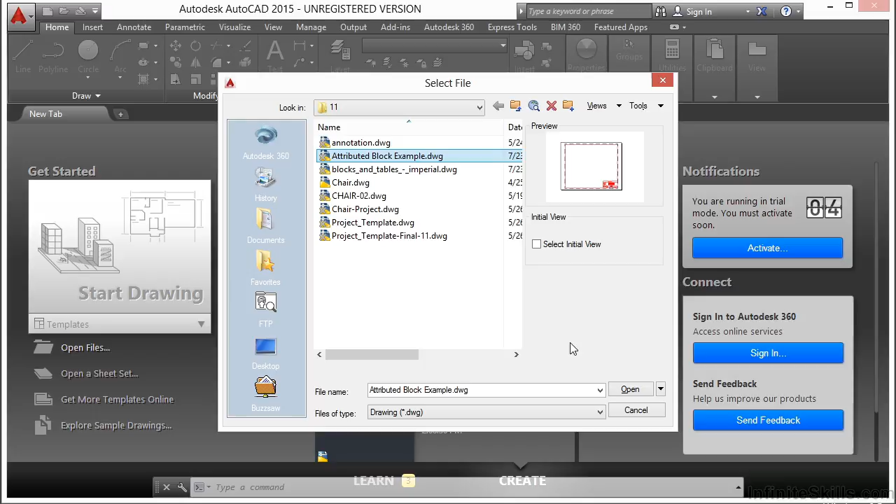This file contains an attributed block that has been inserted as a title block for this drawing. It's right here. So you can see when I hover over it, it looks like it's a block. When I select it, there are a lot of different grips in here. That's for the attributed text. This item here that says prepared for, that's just regular text. I can't edit it or change it or do anything to it.

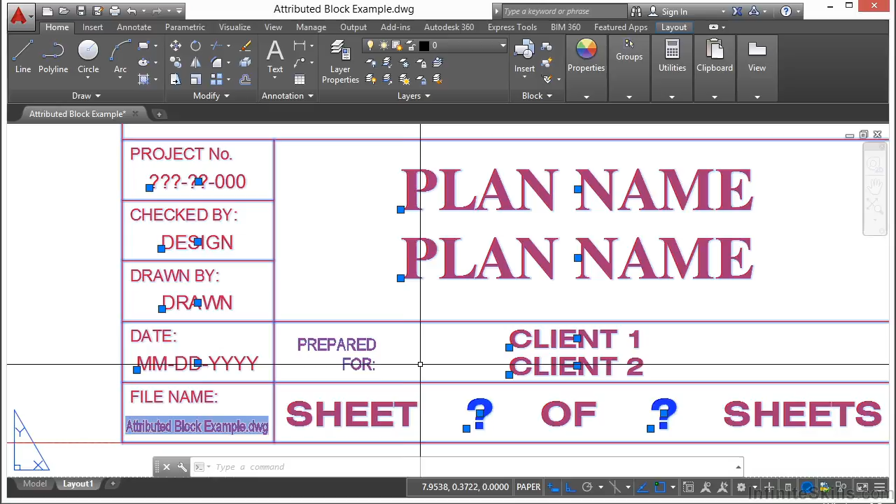Now to edit the attributes of a block, you can double click it. That brings up the Enhanced Attribute Editor window. Here you can edit the text to display what you need it to. We drag this to the side. Here you can see this attribute has a tag. It's called plan, and you're prompted with a plan name number 1 and the value. Plan name or value here is the actual text that is displayed in your drawing.

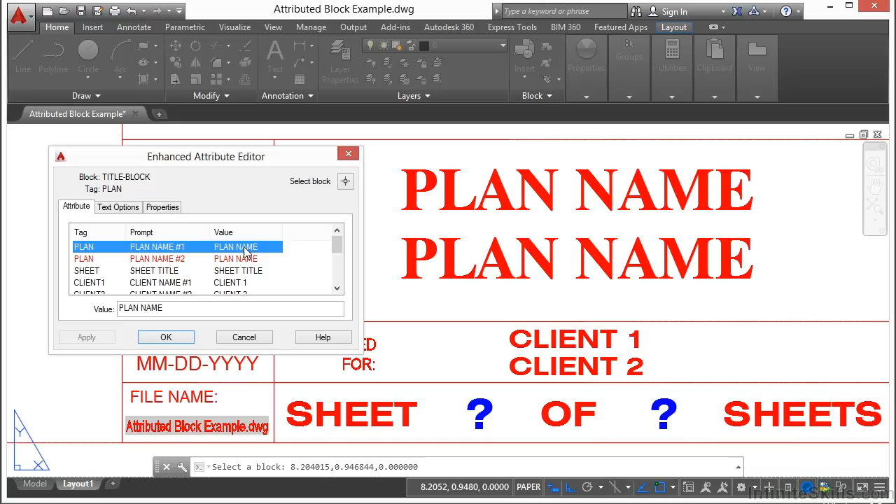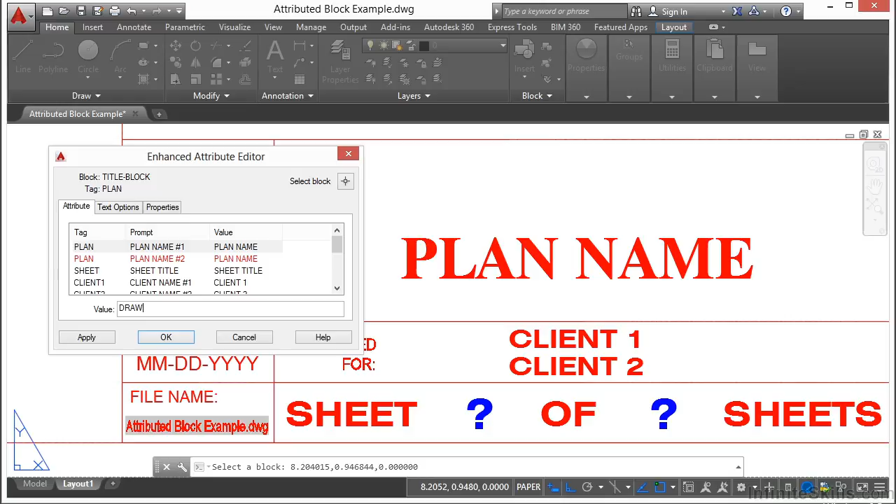To edit that, I click in this box here, and I just change it like I would in any regular text editor. I'm going to call this drawing title. When you're finished, click OK, and you've changed the text in your title block. Title blocks are very commonly used with attributed text. This allows everyone's title block to be formatted exactly the same way and give your drawings a uniform look.

Now here's a quick tip. If you only want to edit one field of data, hold down the Control key and double click on that text field. When you're finished, just left click somewhere off on the screen. Now if you double click it, this gives you access to everything here that you can change. I can call this sheet title as an example, which is right up here. I can say whatever I want it to be. When I'm done, press enter.

Client name, I can just say ABC Company. Click OK, and you can see here that I've changed some of the information on it. Now let's say, for example, I only need one of these lines. That's easy enough. Put a space in there, and now it looks blank. Now to create an attribute in a block, you have to create an attribute definition. It's sort of like creating text, only there are a few more definitions to assign.

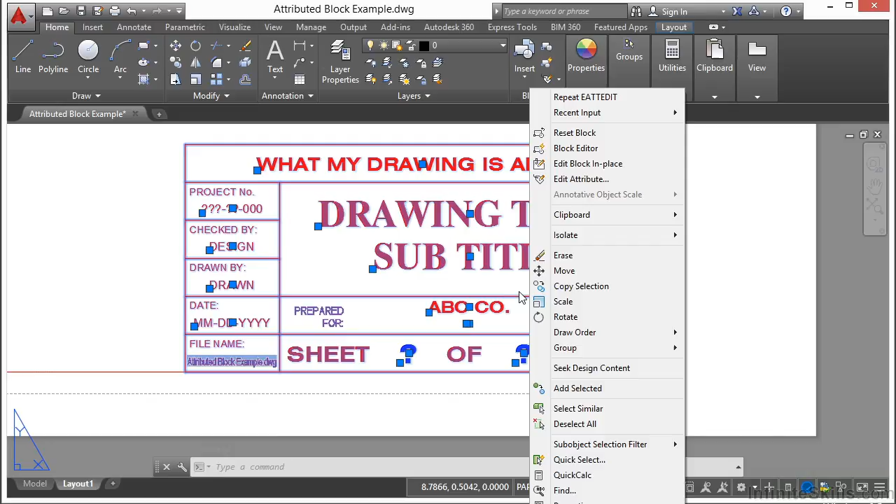So let's edit this block right here. So select it, and then right click on it and go to the block editor. I'm going to close this because we won't really need that. It's just going to get in our way. Each one of these objects here are attributed text. If I double click on them to edit them, I get these three options.

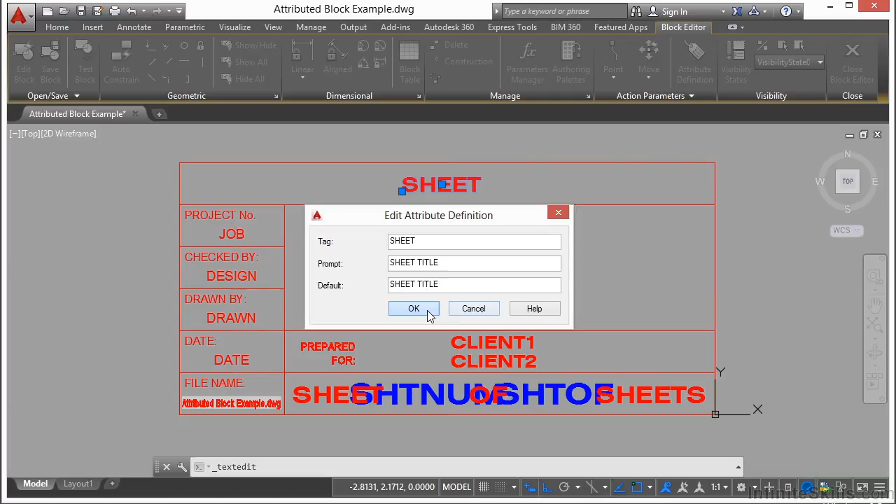I have the tag, the prompt, and the default. The default will automatically fill in this information for you so the user doesn't have to. It's sort of a placeholder. When you're finished, just click OK. Now these have grips so that I can position them however I'd like.

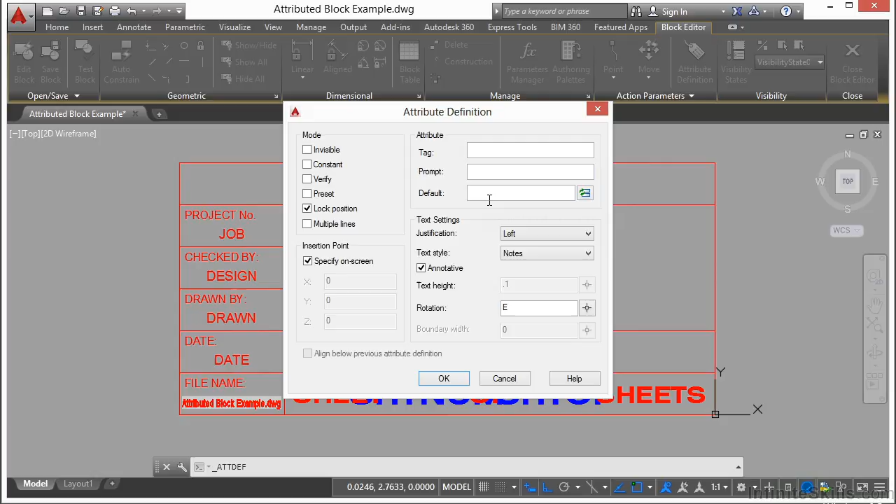And if I want to create a new block attribute, I just come up here to the attribute definition in our block editor ribbon. So this is the attribute definition. I have a lot of different items that I can pick from here, like justification, text style. I can make it annotative or not. I can change the text height. Mostly what you're going to do is enter in your tag, prompt, and your default information.

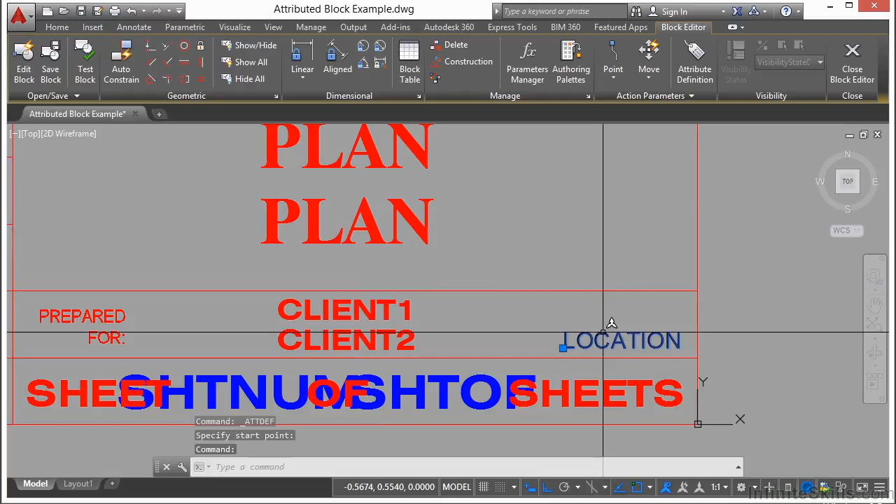So let's say I want to make a tag for location. Now a lot of times you're just going to enter in the same thing, location, location, location. Now when I click OK, it wants to know where I want to put it. I don't really have a spot for it in my line work. I'm just going to put it right over here, just for now. And that's where it is. Now you can also look at the things like layer, size, etc.

Now let's select any attribute. I'm just going to pick the one that I just created. Right click on it and select the attribute order option right here at the top. Now this window opens up, the attribute order window. This will allow you to edit the order the attributes will be listed when you edit the data fields of an attributed block. Now, it doesn't physically change them in any way, just the order in which they're listed.

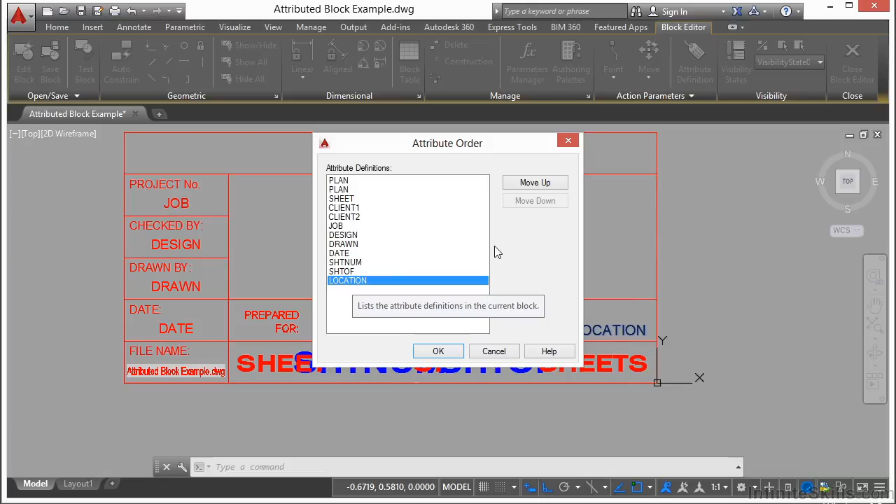So I put in location last, so it naturally goes to the bottom. But let's move it up after the client names. So I'm going to put it up here. So I select it, and then I click the Move Up button. Click OK. And when I'm finished, I'll click the Close Block Editor button. Save the changes to the title block, and you'll notice it doesn't look any different. Where is my location option?

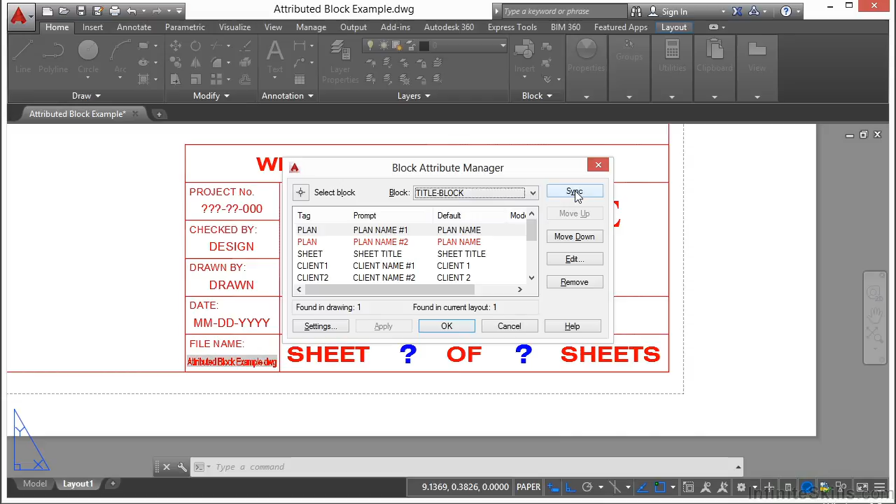Well, there's something that you have to do when you edit an attributed block. You have to use a command called Batman. No, I'm not making it up. It's BATTMAN. It stands for Block Attribute Manager, or Batman. Once you open up Batman, find the block that you just changed, this title block, and then click the Sync button. And that will update every instance of the attributed block in your file.

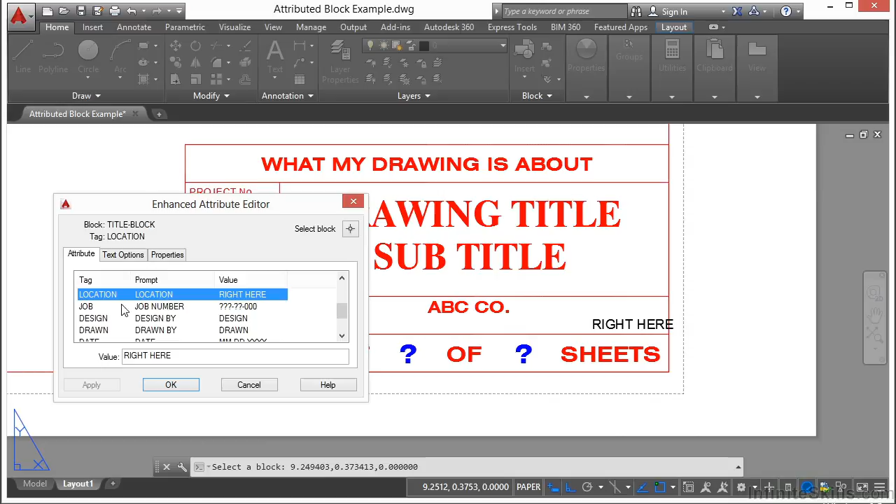Now, I would wish that it would do this automatically for you, but it doesn't. So you have to do that every time. Don't worry, it will be there. Now we can edit our location right here. Now, if something like this happens in your attributed text, just double-click on your attributed block, find the tag that you want to change, go to Text Options, and you have some abilities here to change a few things.

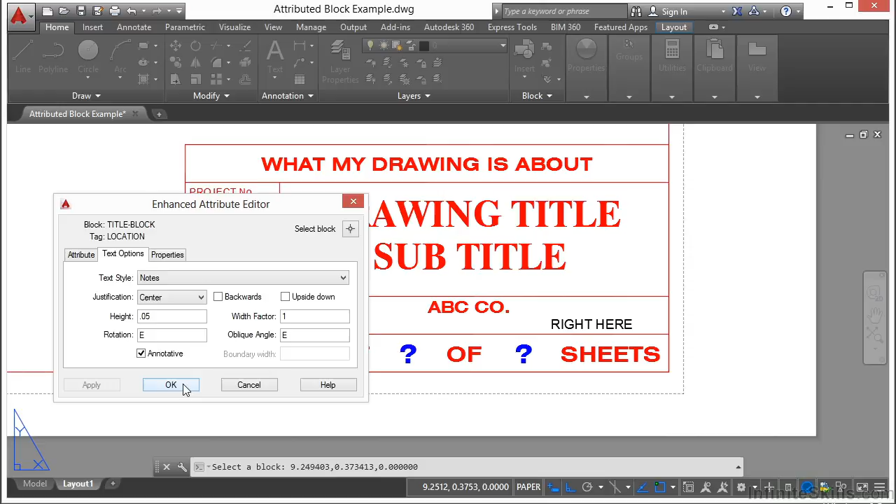You can change the justification, and that might move it. You can change the text height. You can even change the rotation. You can make it annotative or not. You can even change the width factor. There are a lot of times when I've shrunk the width inside something just to make it fit better. It happens. You can also change some of the properties of it right here as well. When you're finished, click Apply and OK. So that's attributed blocks. And a very common use of an attributed block is a title block.